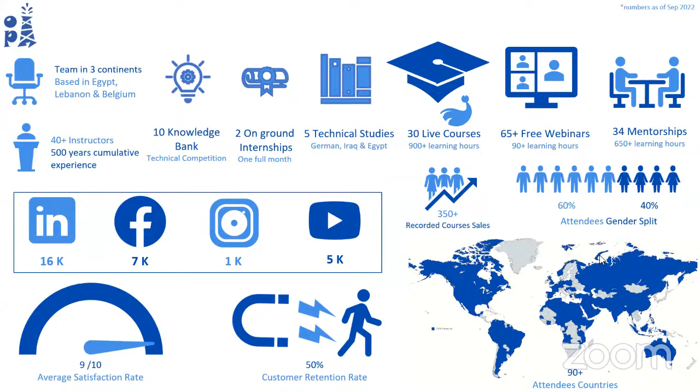So this webinar is an introductory webinar for the next course, which is Gas Lift Theory, Operation and Design, which is going to start on the 27th of May and end by the 1st of June.

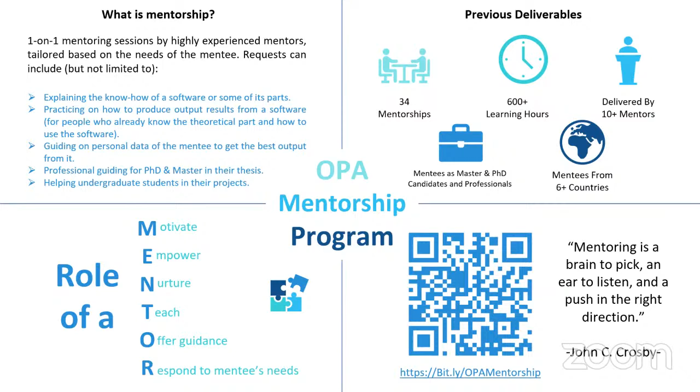Here is our mentorship program. This program is really different from having a one week course. This mentorship program is designed by yourself, so you can choose your instructor and determine what you would like to learn, your learning journey, on an hours basis. So you choose the topic, you choose the instructor, everything is on your design. This is a special program if you'd like to join.

Our topic today is gas lift theory, operations, and design. This is our agenda: we will start with an introduction about nodal analysis and artificial lift methods, then move to gas lift theory, types of gas lift equipment, gas lift design, and end with a case study showing troubleshooting.

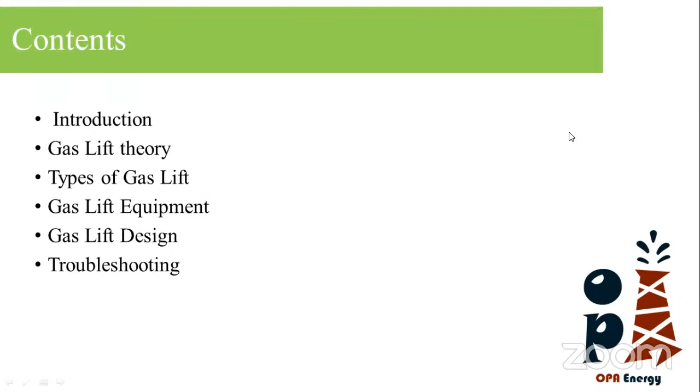Let's remind ourselves of our well system schematic. Production starts through the reservoir as fluid, oil, water and gas, flows from the high pressure of the reservoir into the sand face, what we call the BHFP, or bottom hole flowing pressure. Then it goes through the completion and up through the tubing into our wellhead, where we have our wellhead pressure, and up through the chokes, then the flow line, ending with the separator, tank, or whatever our processing facilities are.

In nodal analysis, we take a point and study the relationship before and after this point. In our case, before the node we have the inflow performance, which is the fluid movement across the reservoir. Here we have our BHFP, bottom hole flowing pressure, and our reservoir pressure, and the difference between them is the drawdown. As the drawdown increases, the rate increases.

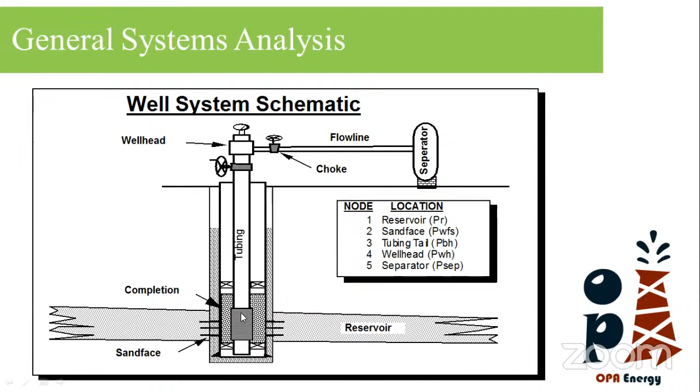On the other hand, we have the fluid movement through the tubing up to the wellhead, and here we have the same BHFP, bottom hole flowing pressure. In order to increase the rate moving through the tubing, we will need a higher BHFP to overcome the frictional losses that increase with the increase of rate.

The upcoming slide shows exactly what I mean. Here we have this IPR curve, which is the relationship between the bottom hole flowing pressure and the flow rate.

As we mentioned, as the fluid moves across the reservoir, there must be higher pressure in the reservoir and lower pressure here, the BHFP. The difference between both is the drawdown. As the drawdown increases, we start with BHFP equal to the reservoir pressure, so no drawdown. As we decrease the BHFP, we increase the drawdown until we reach the maximum, or the absolute open flow, when the BHFP equals zero, which is theoretically not applicable.

Then we have another curve, the outflow, which is the relationship through the wellbore between the bottom hole flowing pressure and the rate. In order to go from here to up, we have two losses: the hydrostatic losses and the frictional losses. As the rate increases, the frictional losses increase, and we come up with this curve. This is the outflow performance curve.

So in order for the well to produce, there must be an intersection between this curve and this curve. The intersection point is the point at which I produce. So for this well, this intersection point is our production rate. Here is our flow rate, and here is our BHFP. This is the point at which we have equilibrium between both the inflow and the outflow.

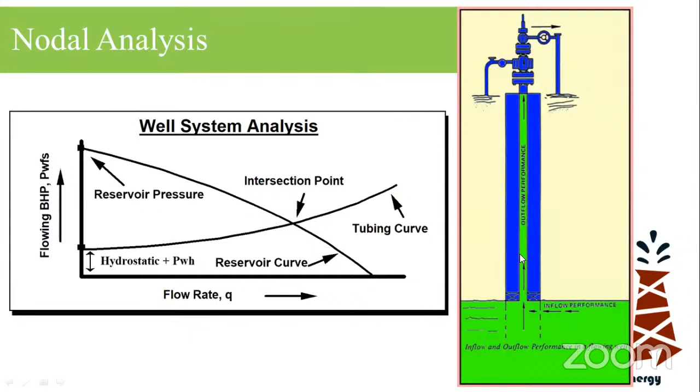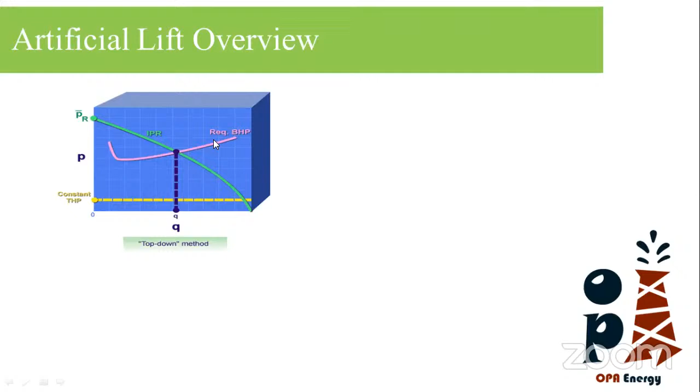So as I mentioned, in order to produce, I must have this intersection. What if the reservoir pressure is low and we don't have this intersection, as in this case? The reservoir pressure may be low, so it doesn't start from here, it starts from down here. Because of this, we don't have this intersection, which means the well is not able to produce naturally.

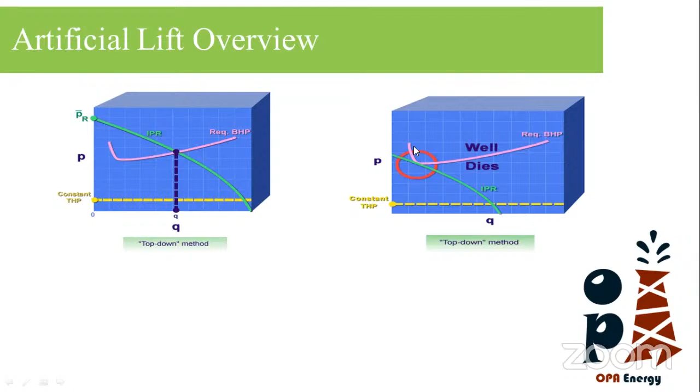So in this case, we can use artificial lift methods. Artificial lift methods can be classified into two main methods. One method is adding energy downhole, or transferring energy downhole into the fluid. Another method, what we will talk about today, the gas lift, is to decrease, as we will see later, the fluid density and the frictional losses through the wellbore.

Before we go to the next slide, I want to emphasize that we use artificial lifts in two scenarios. One scenario is when the well dies, meaning it cannot produce naturally. Another scenario is if we want to increase the rate of the well. For example, I'm producing a well at a rate of 200 or 300 barrels, and for me it's not economic, so I want to increase its rate, maybe to 1,000 barrels or more. In this case, I can also introduce an artificial lift method to increase my rate.

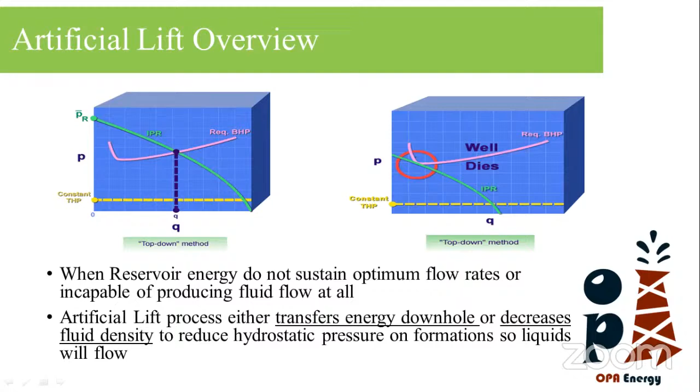This is a quick look at the most common artificial lift methods. As we see, this is the ESP. The ESP is simply a pump and motor downhole with electricity connected to it, and this motor moves the pump. Inside the pump, there are moving parts and other parts in a stationary case, so the movement introduces energy into the fluid that enters the pump through the pump intake, increasing its energy and then its pressure.

On the other hand, there are PCP pumps. These pumps, as we see in the photo, have a rotor, helical in shape, and a stator. This rod is connected up to the surface, where we have a moving engine that turns this rod. It also transfers energy into the fluid and gives it higher pressure to go up to the surface.

Here we have the beam pump, or the sucker rod pump. This is very common, and as we see here, it's like a syringe. We have a plunger or chamber that sucks the fluid in, and then we discharge and compress the fluid, giving it pressure because the fluid is not compressible. So it gains pressure and goes up through valves inside this pump.

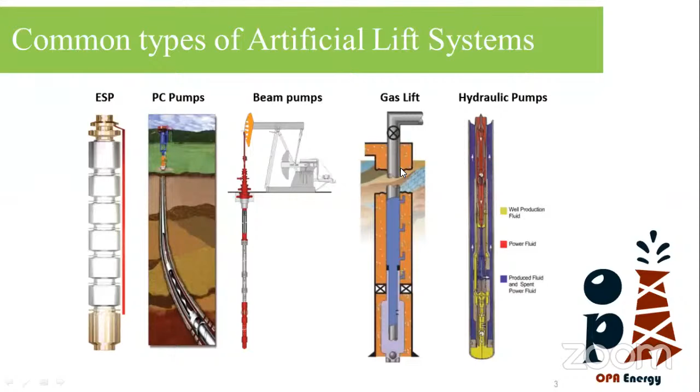ESP, for example, needs an electricity source and is sensitive to sand production. Beam pumps cannot handle high rates. PCP cannot go deep enough. Gas lift, if the reservoir pressure is very low, may not produce the desired effect. Also, hydraulic pumps need power fluid.

So each artificial lift method has its application depending on our situation, and we will see an example when we go through the gas lift method.

Here is a pie chart I wanted to share with you, but bear in mind it may not be updated since it's from years ago. As we see, about 40% of artificial lift is sucker rod, because it's cheap and easy to install, not needing high capital cost. Then gas lift is about 34%, ESP is about 18%, and finally PCP, jet pump and other methods make up the rest.

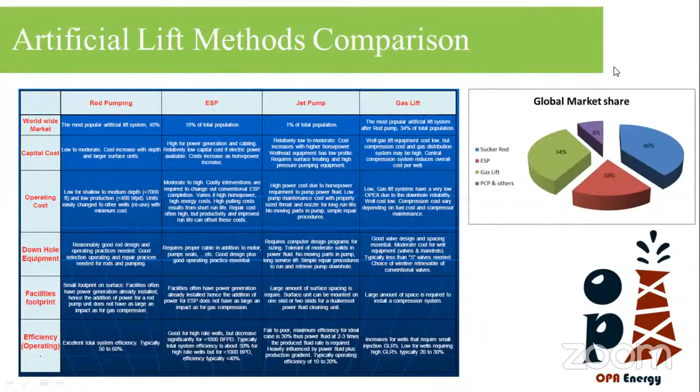So now let's concentrate on our main topic for today: what is the gas lift method, and what is the difference between gas lift and natural flow?

I tried to speak fast in the previous slides because it was only an introduction. Now I'll decrease my pace so we understand everything I'm talking about in the coming slides.

As we see here, the fluid comes from our perforations and these are our producing fluids. It goes through the tubing up, then through the Christmas tree, and we have flow lines with the produced oil and gas.

In gas lift, here is what is added: we have injection gas here, and as we will see later, this injection gas is injected with high pressure.

For example, to get a sense of the numbers, in most of our wells we have wellhead pressure inside the tubing of about 150 to 250 psi, while the injection gas in the annulus here is going with about 1000 to 1200 psi.

This injection gas goes into the annulus, and from there it goes inside the gas lift mandrel and gas lift valve, as we will see later.

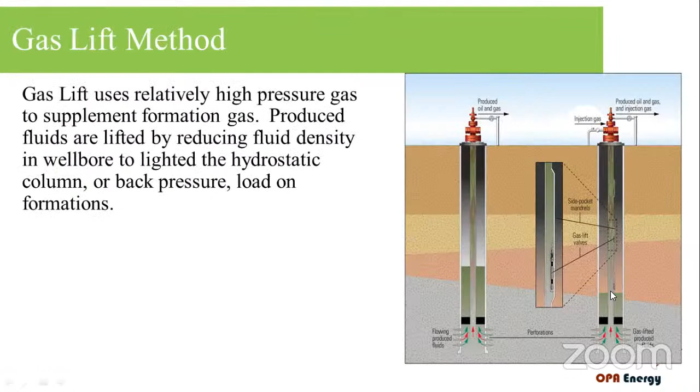In the next slide, we have the advantages and disadvantages of gas lift. The advantage is that it can handle a high volume of fluid, producing at high liquid rates of 5,000, 6,000, 10,000 or whatever. Also, it's not sensitive to sand and abrasive material because it has no moving parts like ESP.

Also, if we have gas available, we can make use of this gas. And as we will see later, these valves can be retrieved through slick line.

On the other hand, we have some disadvantages. First, we must have a source of gas present, because as we will see, this is a continuous cycle. Also, we have high initial capital cost. And as I mentioned before, in some wells the reservoir pressure may be very low, such that the gas lift method is not enough to produce the well.

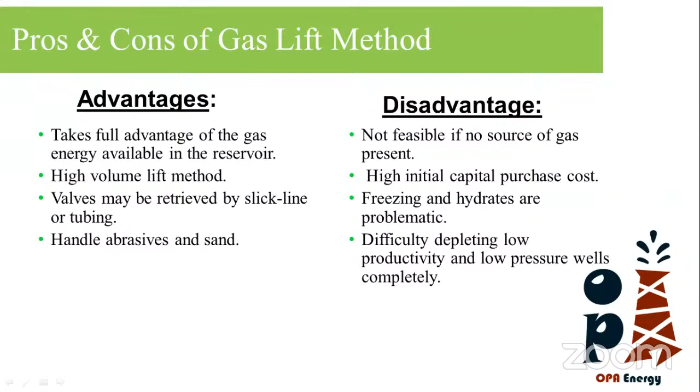As I mentioned in the previous slide, we have a disadvantage of high capital cost for the gas lift equipment. Why? Because as we see, normally...

Let's take this well that is producing oil, water and gas. It goes through a manifold, then through a separator, where the oil and gas are separated.

I mentioned that most of the time the wellhead pressure is low, for example 150, 100 or 200 psi, and it goes into the separator. Normally the separator is at very low pressure, like 60 or 70 psi.

Then this gas, as I mentioned before, we need to inject with high pressure, so this gas must go into a compressor unit where it is compressed and its pressure is raised.

And then it goes into the injection manifold. This injection manifold will distribute gas into different wells, and each well will have a gas injection choke, which controls the amount of gas that's injected into this well. Then it goes down into the well bore, and this cycle continues.

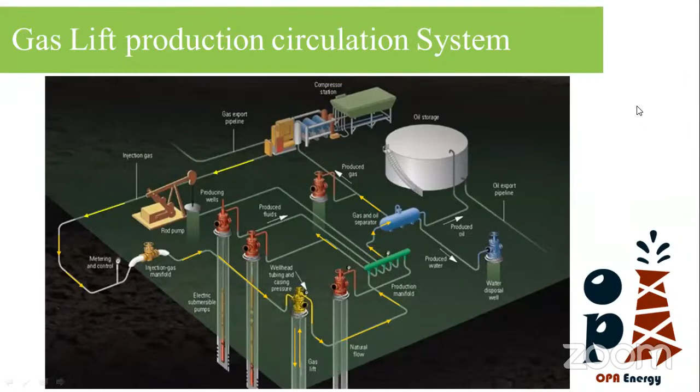And normally, most of the time, when we have offshore platforms, we use this artificial lift method. It's a successful method because we don't have the problems of, for example, the long, big footprint as in the sucker rod, or needing electrical supply as in ESP, or power fluid as in hydraulic pump.

So let's go deeper into our gas lift theory. As I mentioned, here we have our gas injection choke where we regulate the amount of injection gas going into the well. Here we have to understand two things: the upstream pressure, and the gas downstream pressure.

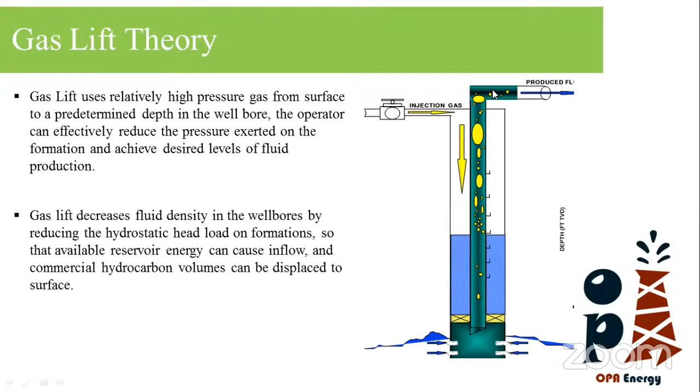And then we go down into the well. We have a certain point where we inject through it. At this point, gas mixes with the fluid coming from the reservoir, and the effect is decreasing the pressure losses across this well bore. So as we will see, the next slide shows this.

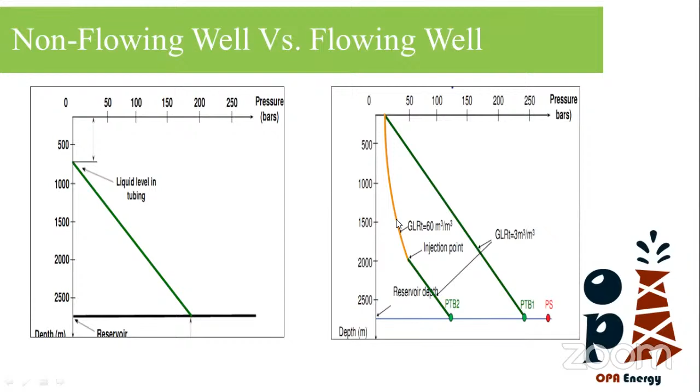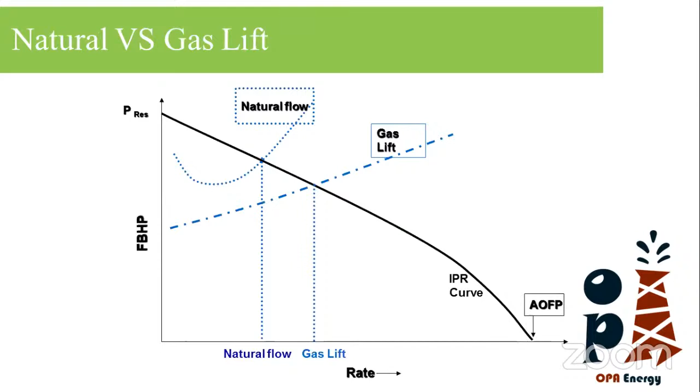As we know, when I flow through the well bore, I have two components of pressure losses, two main components: the hydrostatic losses and the frictional losses. So introducing this gas decreases the hydrostatic losses above the point of injection.

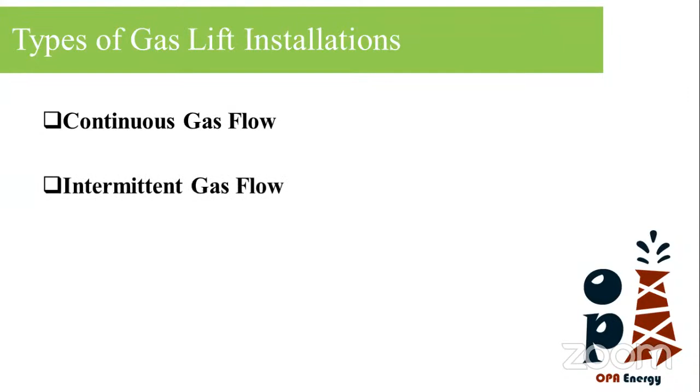So what types of gas lift installation do we have? We have the continuous gas flow and we have the intermittent gas flow. So this is normally the continuous gas flow.

As I mentioned before, we have our injection gas going with high pressure down into this injection valve, and it produces up the mixture of fluid. The formation here produces our formation fluid with its gas oil ratio.

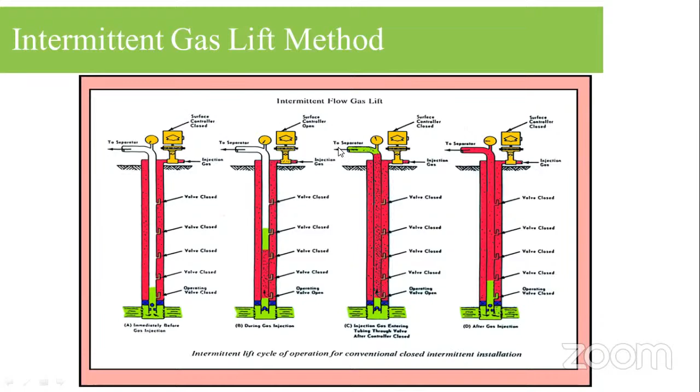Another way of dividing the types of gas lift is according to the completion type. For example, the type I spoke about is the normal tubing flow type, where I inject gas into the annulus and produce through the tubing. Sometimes when we have a very large fluid rate, the annular area is sometimes bigger than the tubing area, so I can inject through the tubing and produce through the annulus. This is another way of dividing gas lift methods according to the completion.

As I mentioned before, the main concept in gas lift is that I increase the gas liquid ratio, which decreases the overall pressure losses. One might ask, why not increase the gas as much as I can? That's not the case, because as we increase the gas liquid ratio beyond a certain value, the effect will be reversed. We will have more frictional losses, and at the end, rather than decreasing the overall pressure losses across the wellbore, we will increase them.

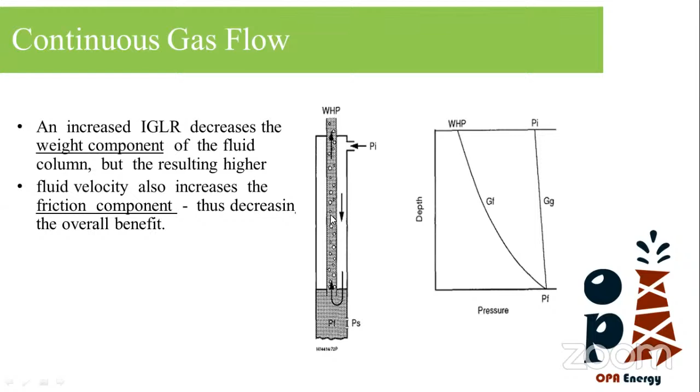So again, here we inject the gas. As we inject gas, the gas liquid ratio increases, and on the other hand, our hydrostatic pressure decreases. So as we increase the gas, these pressure losses decrease, but up to a certain value, we will have more frictional losses due to high gas liquid ratio. This increase in frictional losses will compensate for the decrease in hydrostatic losses, and we will end up starting to increase the pressure losses. From this we can get our optimum gas injection rate, or gas liquid ratio.

So this is what I wanted to mention. For example, here the well is dead, I am not using gas lift. Then I introduced or used gas lift, so as I injected more gas lift, I can go with the curves into this.

I can go into this, having more rate, until I reach a certain value of the injection gas. When I increase the value of the injection gas beyond that, my rate will decrease, as we will see here.

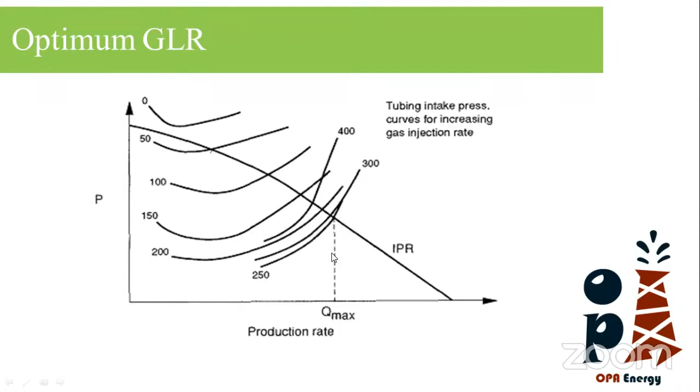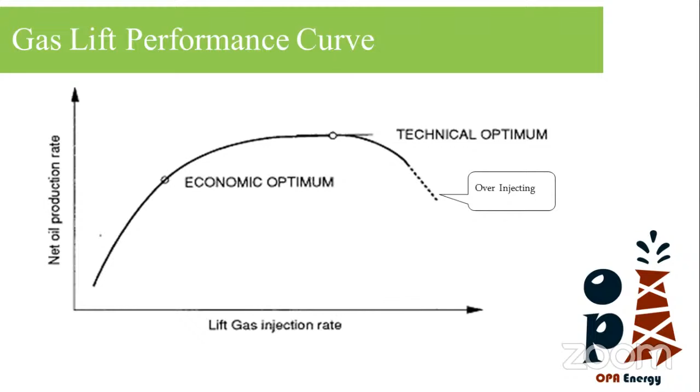So we spoke about the theory and the different types of gas lift. Now we will talk about the gas lift equipment in more detail. We gave a small summary about the surface facilities. Now I'm concerned more with the downhole part of the tubing.

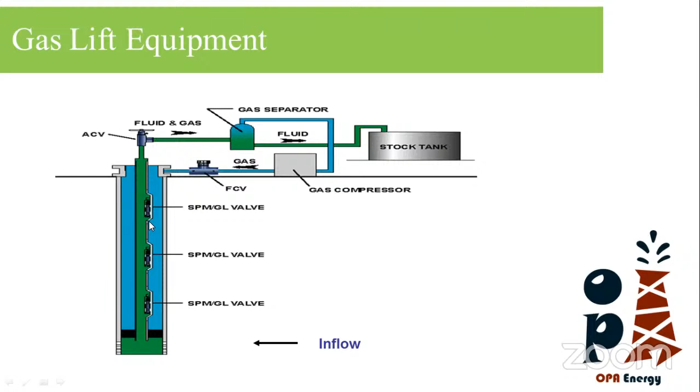Normally, in the well completion of the gas lift, we have two things that we need to investigate: something called the side pocket mandrel and the valve itself.

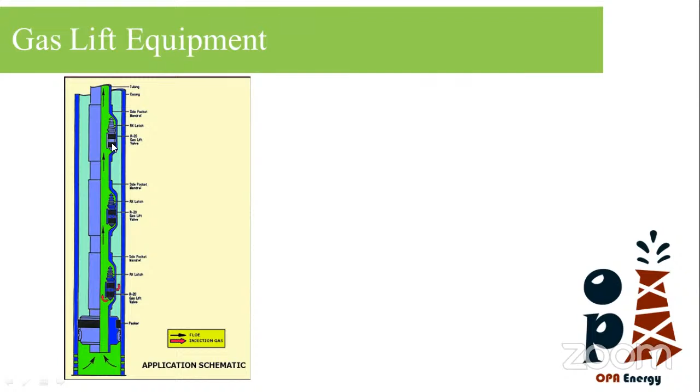This will illustrate more what I mean. Here, this is the casing, and this is the tubing, and this is our packer, and this is the annulus side. In the tubing, when we run downhole with gas lift, we have a part of the tubing with greater size here. It's called the side pocket mandrel. This mandrel is designed so that I can put this injection valve inside it, and here through the annulus, I have ports here in this area. This gas goes inside these ports and then inside the valve itself, as we will see later, and goes into the tubing. So the communication between the annulus and the tubing here is through the port in this mandrel, and inside the valve itself, there is a hole here, and we will see it more obvious.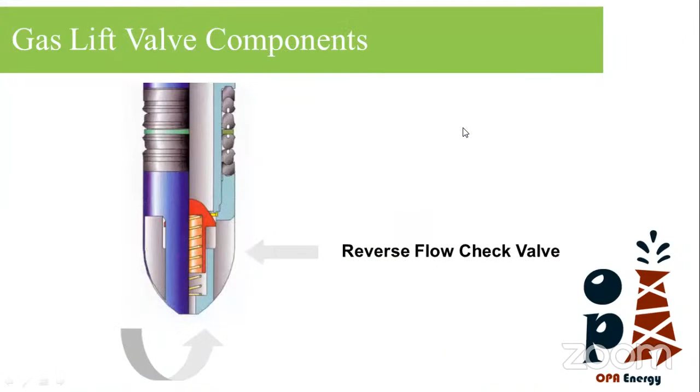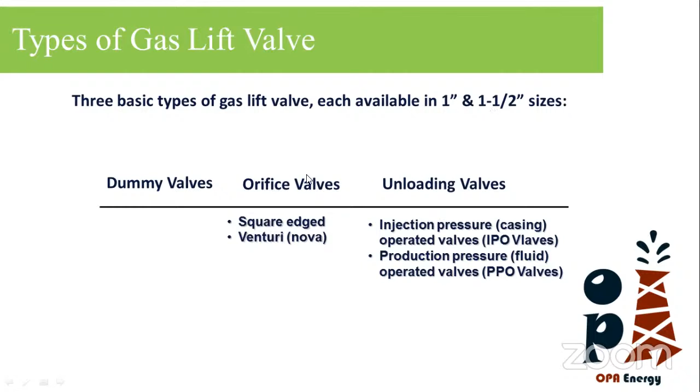Normally, the available or basic types of valves that come in 1 and 1.5 inch sizes are dummy valves, something we call orifice valves, and unloading valves. I will go quickly through each type.

Dummy valve, as we see, it's only a metal board. It doesn't have any holes or anything to inject gas through it. We will understand later what are the scenarios or cases where I use it. Again, it's only dummy - it's like a part of metal inside the mandrel, and it doesn't allow any gas to go inside or outside through this valve. It's like I closed the mandrel at this depth.

Then we have another thing called the orifice valve. From its name, it's orifice - orifice means only holes here into the valve. It doesn't have a dome or springs or anything. It's only like an opening orifice, an opening valve. It's always open. This orifice allows the gas injection to go through the valve down into the well bore.

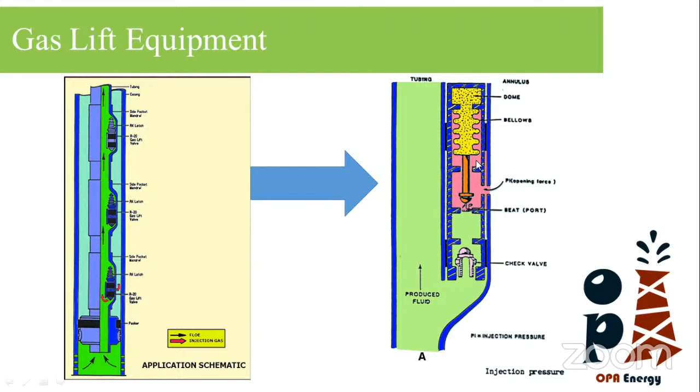And the last type is the operating valve. The operating valve, here it's more obvious. This operating valve has a dome or bellows and a stem, and it closes and opens according to the pressure supplied to this valve. It's called the operating valve.

So these are the main types of orifice valves that are known, something called square edge orifice and Venturi or Nova valve. The name, function and benefits are based on the shape of the orifice itself. As we see here, the gas goes from here into the valve and through this orifice into the tubing, while the Venturi has a different design, and this has more benefits in case of unstable cases or when we need a very low delta P across the valve.

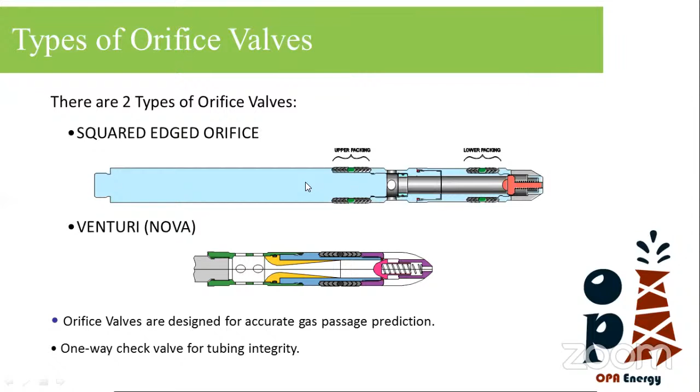For me now, because we don't have more time to go deep into each valve, the most important thing is to know the names, and later you can search or learn more about it.

This side pocket - many of us can ask ourselves how will I retrieve this valve from here, like I have this tubing and the valve here inside this part. It's on the side wall of the tubing. So how can I retrieve this valve and how can I run in this valve? This can be done with two things.

Something called the orienting sleeve inside the mandrel itself, and something called the kickover tool. So what's happening is we have this valve, as we mentioned, the gas goes here into the orifice in the valve and then goes down here. Here we have the latch. We have something called the kickover tool. This kickover tool goes with this side arm into the valve, and we can run the valve down or we can pull the valve up.

And this can be done with the help of the orienting sleeve. Here, we go down with the kickover tool, and then we go up. When we go up, we see something like a metal finger. This finger goes into the orienting sleeve, and it forces this arm to open to the side.

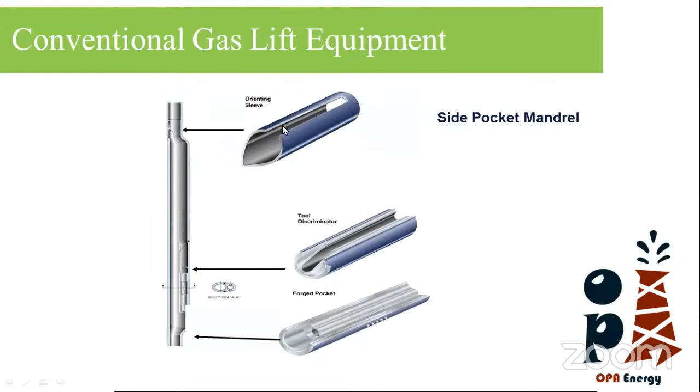Again, we have this orienting sleeve, we have like a finger. When we go up with the kickover tool, it rotates and a finger goes here. This finger will force this arm to go into the side pocket mandrel, and then we go down, and with jarring, we can set the valve. On the other hand, we can latch onto the valve and take it up and change it, whatever operation we need, like running down a new valve, or pulling the valve and removing it, or whatever we want.

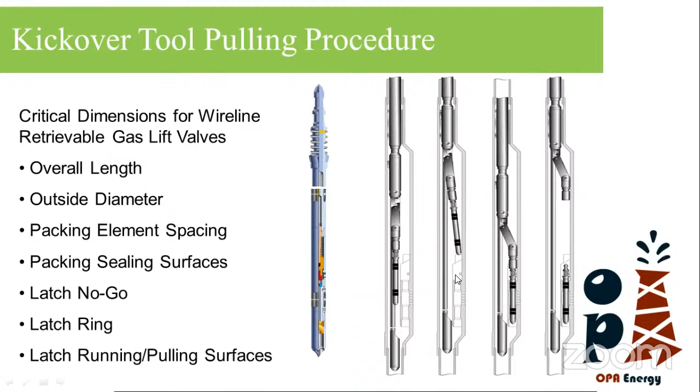So I'll mention again quickly, we have these three types of valves: we have this dummy, we have this orifice, and we have what we call the unloading valve or operating valve. For this valve, we need to know some of its mechanics, when it's open and when it's closed, and what forces make it open and close.

This is an operating or an unloading valve. As we see here, we have bellow pressure or dome pressure. We mentioned that the gas goes from the annulus into the port, into the valve, and it makes force into the area between the stem and the bellows.

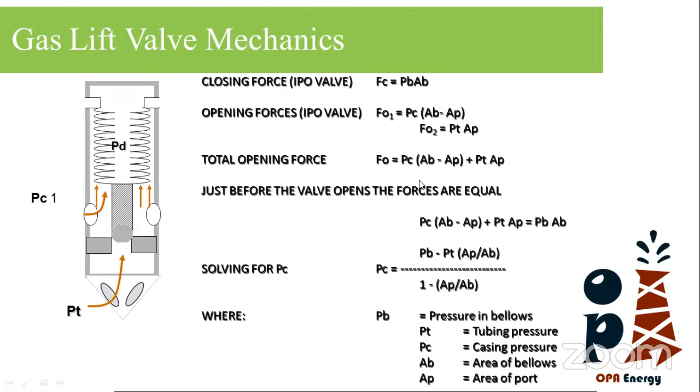In a simple way, in order for this valve to be open, I have a certain bellow pressure that makes the valve close. On the other hand, I have two pressures that help me open this valve: the casing pressure and the tubing pressure. But most of this force is coming from the casing pressure. For example, like 80 or 90% of the opening force is coming from the casing, and like 10 or 20% is coming from the tubing pressure to open this valve.

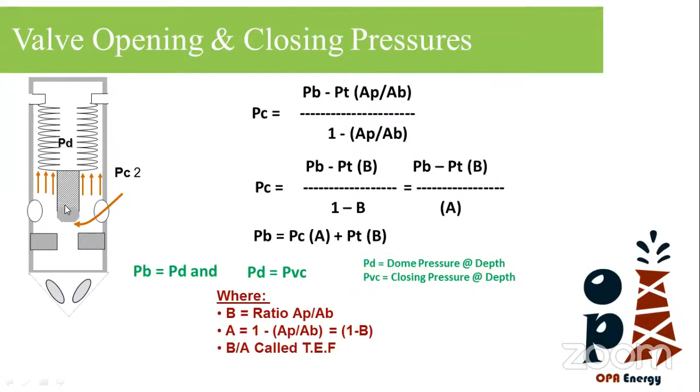This leads us to the next thing: we have two types of these unloading valves. We have something called IPO, and we have another type called PPO. In continuous lift method, we have this IPO valve. Normally, the casing works against the area between the bellow and the port, and the tubing, as we mentioned, works on this area. This is called injection operated gas lift valve, and it's mainly used in the continuous injection lift method.

We have another valve called PPO valve. In this scenario, the arrangement or schematic is different. It's reversed: the casing is working against the stem, while the tubing pressure is working against the area between the bellow and the stem.

The message here is that in the IPO scenario, most of the force to open the valve comes from the casing pressure, while in this other scenario, most of the force required to open the valve comes from the tubing pressure. This is normal, because in continuous injection, I have a certain injection pressure and I open this valve and want it open all the time to inject. While here, I want to build up a certain fluid column, and when it gives high pressure, it will open this valve and let the injection gas come in.

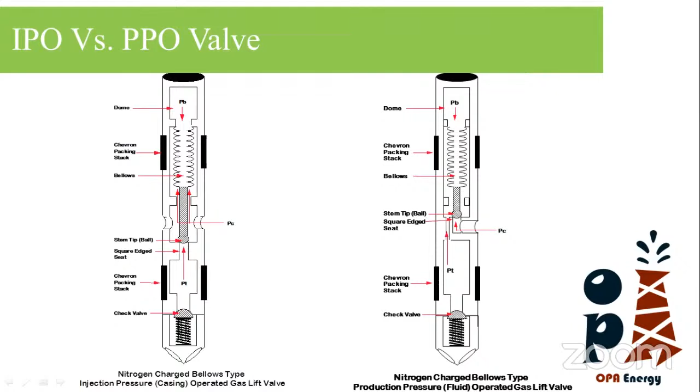Another method is called proportional response gas lift valve. Rather than the main force coming from a certain single component like before, here it's divided between both the casing and the tubing.

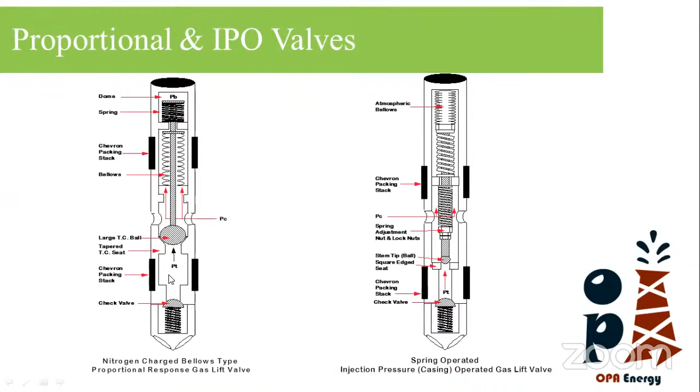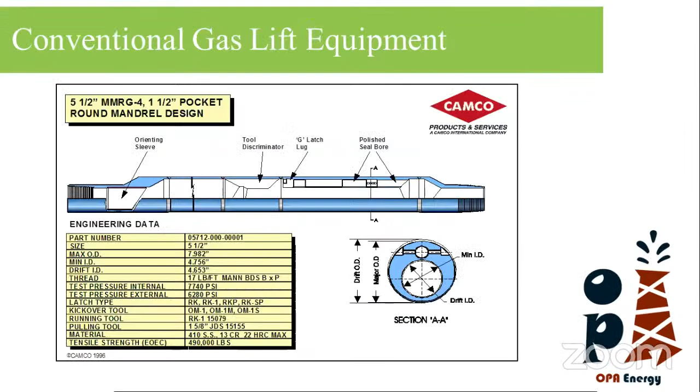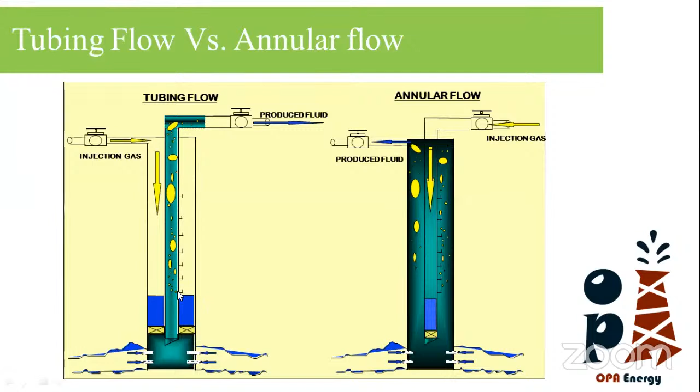I mentioned that we have only one operating point in the gas lift injection from the beginning, but in the same time, I have some valves above it, and also I may have some valves below it.

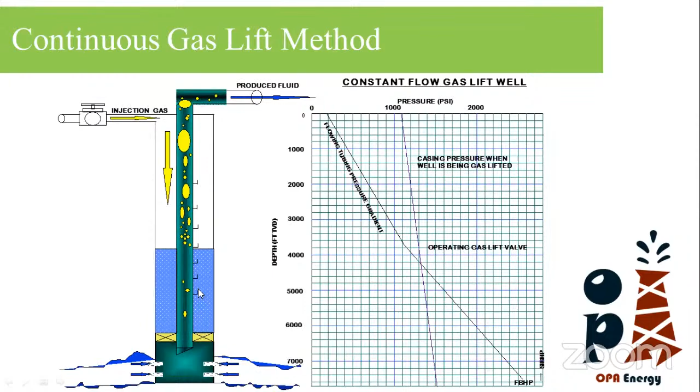So why is this? Why do I have to introduce more valves than I need? Why not just have only one valve that I inject gas through and have my production? This is because normally when I complete the well, I perforate it, and then I kill the well. I have fluid all the way to the surface in the annulus side and in the tubing side.

If I go here with a gauge, as we see, we have the tubing pressure and the casing pressure. If I go inside the tubing, I will have from the wellhead pressure the gradient of the completion fluid inside the tubing and inside the annulus. And we will see that all the valves will be open because they have high hydrostatic pressure above them.

So if I tried to inject gas, it cannot reach deep, for example, if I produce with wellhead pressure of 100 or 150 PSI, this injection gas pressure can be like 1,000, 1,200, or even 1,500. So I'm limited to the capacity or the performance of the compressors I have, and I cannot increase or use the pressure more than a certain value. So if I inject gas, it will go according to its pressure and push this fluid into here and go into its maximum depth, which is the depth of the first valve.

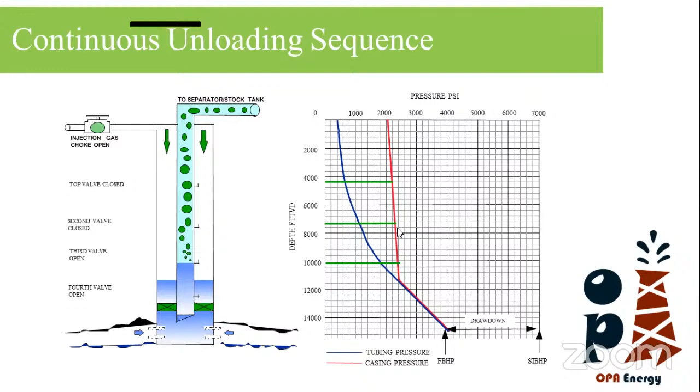The design requires me to calculate the depths of these three valves. I need to identify where my operating point is, and on the same side, I need to know how many unloading valves I need and what the opening pressures are for these valves. So this is design: I need to identify the depths of each valve, either unloading or operating. And for the unloading valve, I need to identify or calculate the bellows charged pressure. We have many methods for gas lift design, and there are a lot of inputs that we need.

One of the well-known methods is the Pt minimum, Pt maximum method that I will use today with you.

So how do we do our design? It starts with the pressure gradient curve. What does it mean? It means I'm producing with a certain rate, for example like 1,000 barrel or 2,000 barrel with a certain gas liquid ratio. And then at a certain depth, which is the injection point or the operating injection point, this gradient changes until I

reach the tubing. On the other side, I have the available injection gas. As I mentioned, the injection gas is injected with high pressure, and this is our injection pressure.

So I mentioned before this, and as we see, we start from the wellhead pressure with a gradient of the completion fluid, because I have inside the wellbore, when the well is killed, I have a completion fluid.

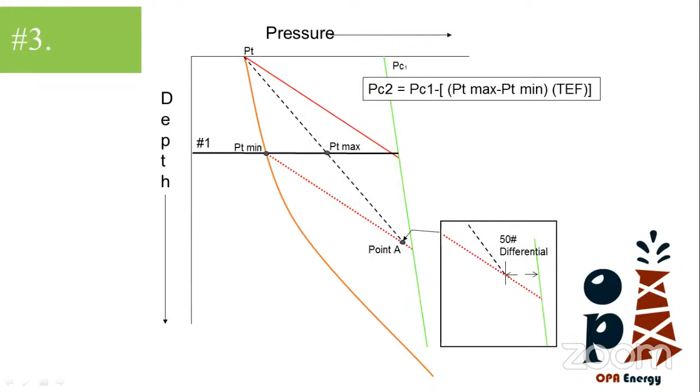Also, I identify at each valve which is the casing or injection pressure that will open the valve. And I calculate the difference between each casing pressure. For example, to make it clear, the first valve started at 1000 psi injection pressure. Then the second valve needs an opening pressure of 966.

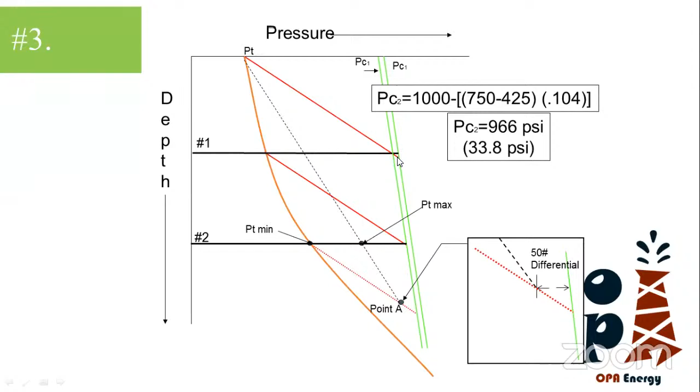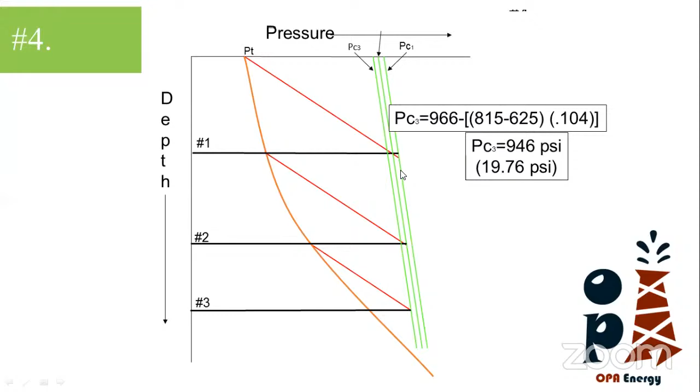When I decrease below 966, for example to 950, I will see that the first valve will be closed. Then, when I reach 946 as the third valve, this valve will open, and when I reach a pressure below it, the first two valves will be closed, until I reach my operating point.

And for example, if they are dummy, I can put valves inside them, and I can change the upper valves with a slick line and use them as injection valves.

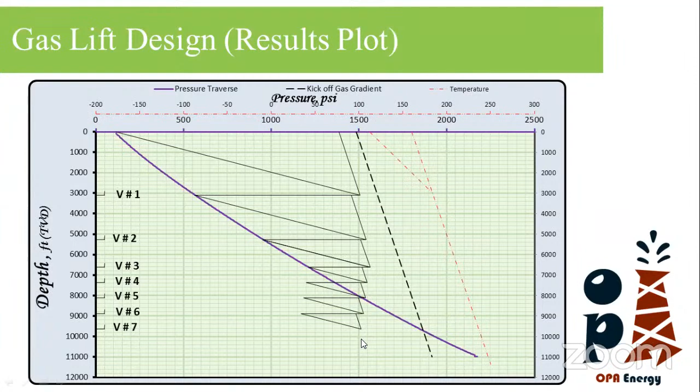Last thing I would like to share is the troubleshooting. Troubleshooting is when the system is not working properly and I need to improve it. We have some well parameters, surface parameters, that I can look at to know if the system is working properly or not. For example, the wellhead: if there's a surge in the wellhead pressure, or if the wellhead temperature is not normal, from these things I can understand if there is a problem in the gas lift.

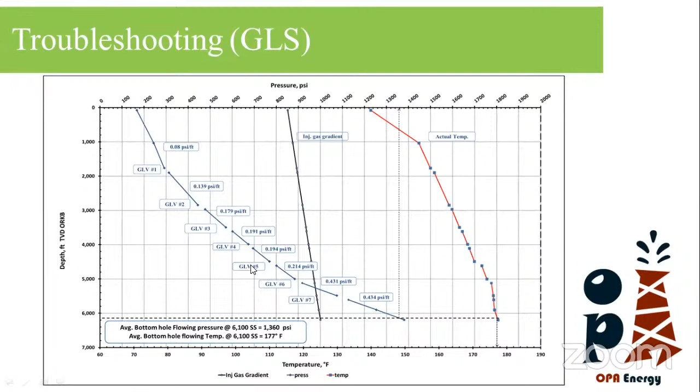On the other hand, when I look into the temperature here, I can see there's a cooling in front of this valve, which confirms that this is the valve taking the gas. But when I go up, I see also some cooling here, which suggests there is some leaking through this valve. So I will recommend removing this valve and changing it with another valve, fixing or editing the bellows charge pressure.

Thank you all for listening. I hope this was a useful webinar. I tried to give as much information as I can because gas lift is a great topic and has a lot of things to cover. Normally some of the topics we covered today need longer time to be covered fully. I hope you all enjoyed it, and I'm open for questions if you want.

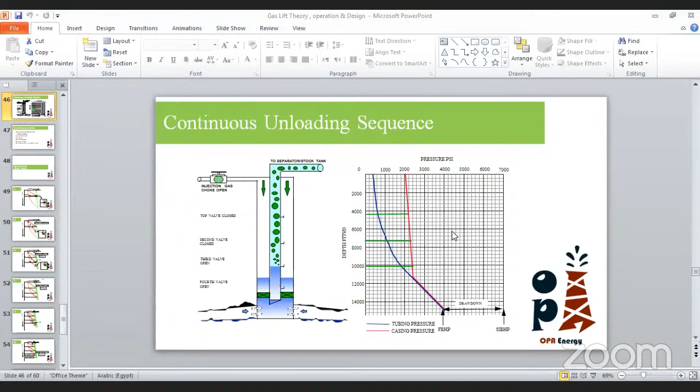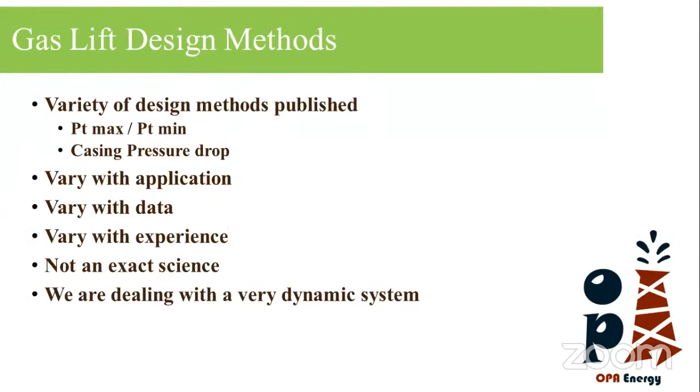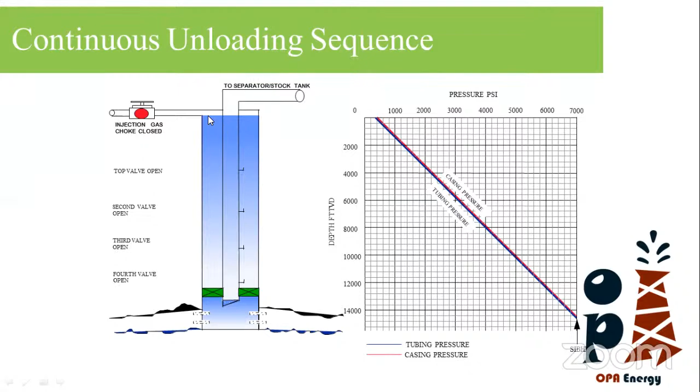So I start, for example, if I came with the first design here, I start with this completion fluid and its gradient, and I go like this. But what if, for example, the fluid level is lower? I can start with this instead. But the problem is I always have the danger of having the valve too deep, with the fluid level up, and when I start to inject, the gas cannot go deeper. At that point, I will have only one solution: go with coil tubing or nitrogen and try to unload the well. So this is the risk of it.